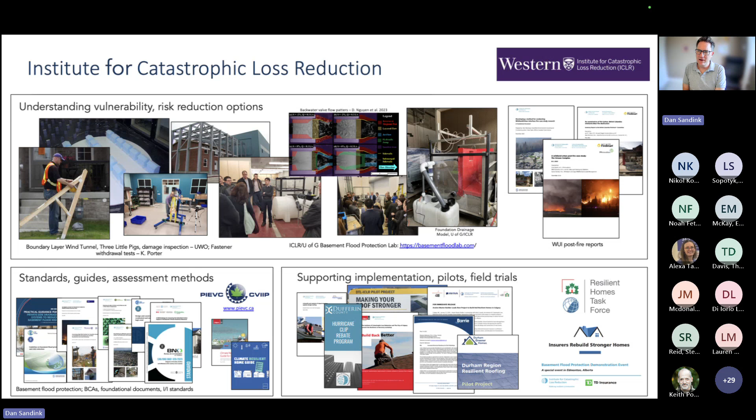On that topic, so I mentioned before, we focus on residential construction. One of the reasons why we focus on residential construction is because that's what we see driving a significant portion of disaster losses, insured catastrophe losses in Canada. My charts here are just providing examples of the proportion of loss associated with personal property claims associated with catastrophe events in Canada.

When you add up all the events over the past 10 years, 2016 to 2025, we find that personal property losses, so losses associated with residential buildings, contents, additional living expenses, account for most, two-thirds of overall losses. And when we break this out into the main drivers of insured loss, hail, wildfire, pluvial flood, high wind, we also find across those hazard drivers of loss that residential buildings drive the greatest proportion of loss. So that's why we focus on that topic.

And I'll describe that our Resilient Homes Task Force is focused on these four topic areas.

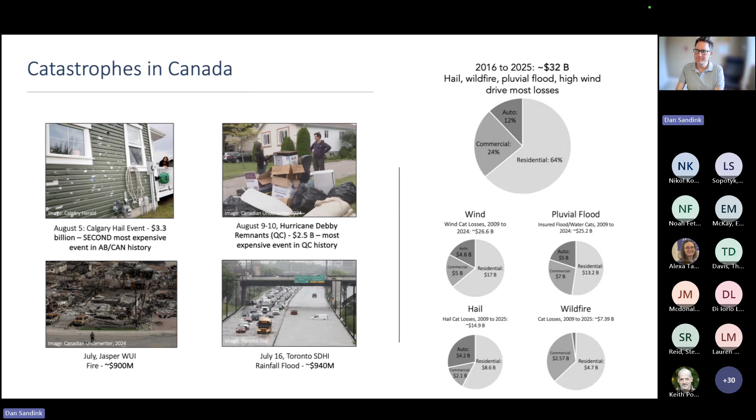The point here is that we have an increasing trend. If we look at both insured loss and societal losses, we find that overall losses are growing at a speed of over two times just the insured losses. The annual increase is about nine times population increase. So it's a significant problem.

One of the things that we do have available to us with respect to the four major drivers of loss is good technical information on how to reduce the impacts of these events. So when we're thinking about homes and communities and exposure to wildfire, urban pluvial flood, high wind, hail, we have pretty good technical information on these topics. We generally know how to protect buildings, but we found that there's been very little uptake of these measures in the building industry and society generally.

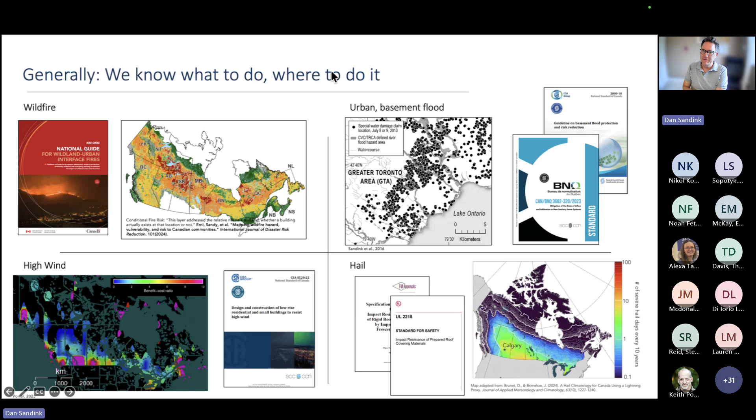So we approached the Canadian Home Builders Association a few years ago, and argued that we should work collaboratively to address the gap between available practices and implementation on the ground of resilience. The argument was that both of our industries, home building and insurance, would benefit from better understanding of resilience practices and building capacity in both industries to apply these measures.

We started discussions with the task force back in February 2024. We've now completed the first phase of work with the Resilient Homes Task Force and are moving on to our second phase. With the initial group, we developed a strategy - a roadmap to move from isolated application of resilience practices in the building, insurance, and renovation contracting industries to more mass market application of those measures.

There's a number of projects we pursued to build capacity in those industries. Field trials were a big part of it, as were guidelines, so that's why I'll focus on those topics today.

Aside from field trials and guidelines, which I'm going to talk about mostly today, we produced a lot of outputs during the first two years of work under the task force. I presented with my colleague Tamara over the past few months to the Friday Forum group and described some of the outputs, like our market research studies. We've done lots of engagement with different groups.

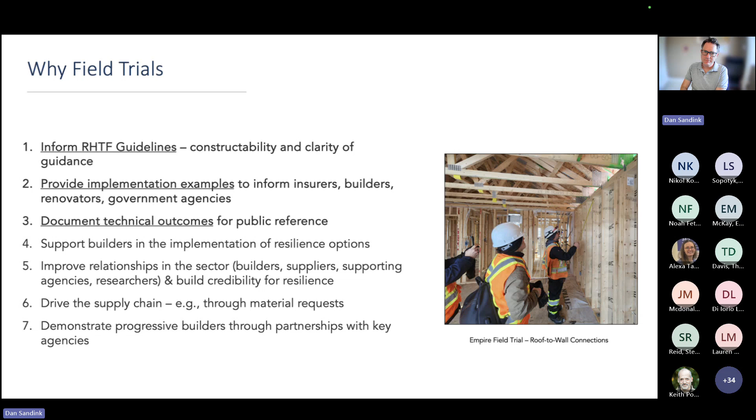At a higher level, the route we're trying to follow mirrors what's been done in greenhouse gas and operational carbon, in application of energy efficient HVAC systems and so on. We're applying a market transformation exercise where we want to move from theoretical or academic practices to market acceptable practices. There's been a lot of work done in this field, and this is one example of a strategy or the necessary conditions for market transformation.

This is from the Energy and Mines Ministers' Conference a few years ago, where they were promoting energy efficient HVAC systems. The argument was that for market-wide adoption of new technologies in the building sector, a number of conditions have to be met.

The building sector needs to be aware of practices or technologies. The technologies have to be available in the Canadian marketplace or in local marketplaces. They have to actually be manufactured. The practices and technologies have to be available from manufacturers.

The practices have to be acceptable, so they have to fit the workflow. They can't introduce significant technical complexity into the construction of buildings.

They have to be affordable. They can't introduce significant additional cost. And I would also add the concept of marketability.

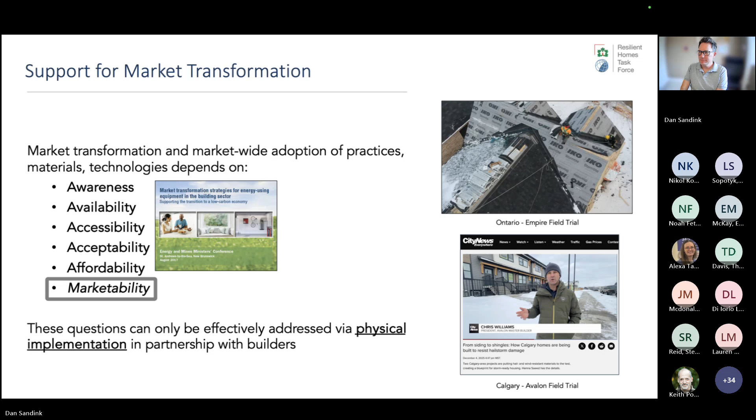The technical knowledge part of the field trials is also important. As I mentioned, we want to apply the measures, learn from application in the field, and have that information feed back into our guidelines.

These are all just examples. This is notably from the Empire field trial, where we applied different gradings for sewer laterals so we could better accommodate backwater valves.

Empire installed a whole continuous load path and some lateral load connectors that were not common in construction practice. We learned a lot through working with them and their modular builder supplier about the details of applying these practices and what's required, again to make sure that what we're recommending for the industry is practical.

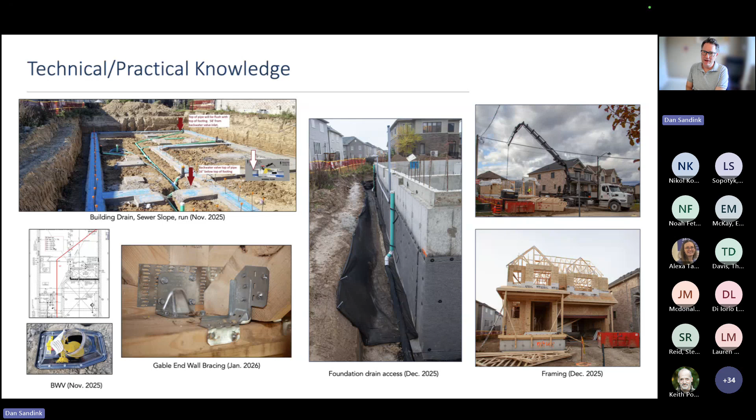There's a number of outputs from the field trial projects that you can access, and I'll provide a link shortly to our Resilient Homes Task Force page.

We have public outputs, things like media interviews, press releases, and that sort of thing. That's more open for the public generally.

We have industry associated outputs. Part of what's being produced from the field trials is videos and web content aimed at other builders in the building sector generally. We're communicating with the insurance industry on outputs of the field trials, especially as it relates to costing of practices, material availability, and so on.

And then there's more technical outputs, with some examples on the right: technical papers, publications, and usable materials for the building sector.

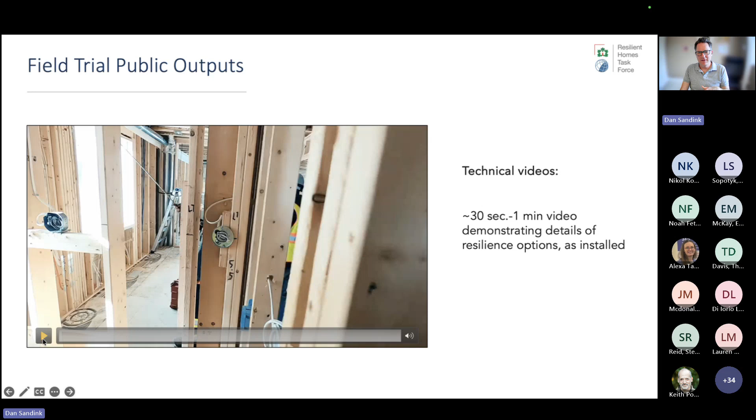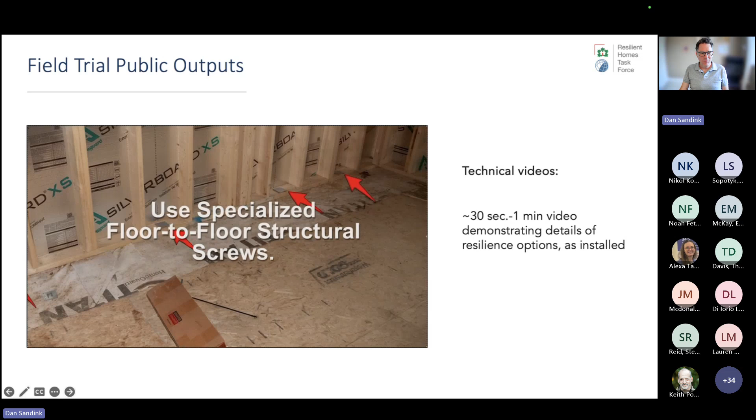One example, aside from the technical reports, is that as builders are installing the measures in the field trial homes, we have a videographer on site recording application of these measures, with the intent of providing practical information to other builders that might explore applying them.

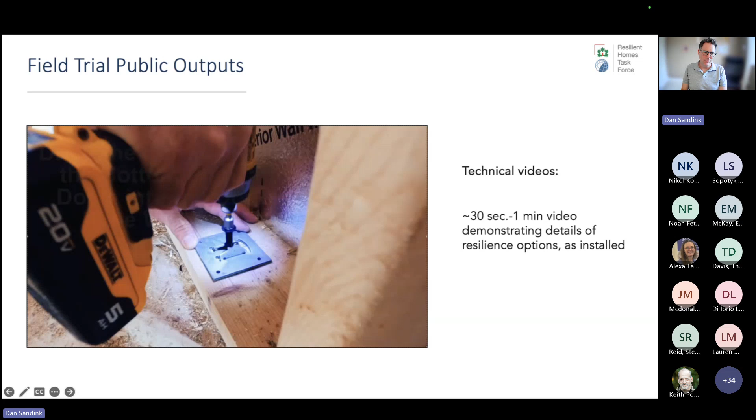So instead of talking about or suggesting floor-to-floor connections, we now have a specific relatable example of how it's actually done in the field.

These examples can be helpful in training trades and getting them on board with application of these measures. So there's a whole bunch of outputs related to field trials, which demonstrates why they're so important, with all these multiple outputs that we get from them.

Another important output of field trials is that they can serve as the core of strategic partnerships. I've got a couple examples here. We've got lots of really good partnerships now, and the guidelines and field trials I think really set the basis for us to have good partnerships.

And promote the concept of resilience. One example is EnerQuality, which was enticed to work with us because of the tiered guidelines and the stepwise approach that builders could potentially take. They worked with us and Farsight to coordinate the IDP work for a field trial in Southern Ontario that's starting up now, and they're serving as an Ontario node of information that has been helpful to us to get our perspective out into the industry.

And again, that's really dependent on usable resources and working on field trials, providing examples of practical application of these measures. Another example is the Durham Region re-roofing field trial.

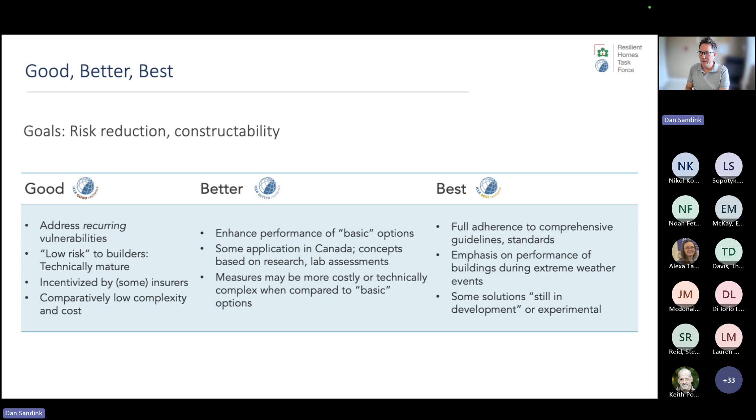So these guidelines, and also a number of the outputs I mentioned before from the field trials, are available at this website, so you can check those out. We have the tiered guidelines now available for the core hazards: wildfire, basement flood, high wind, and hail.

The guidelines also include some other elements. There's introductory material, and there are technical sheets. The technical sheets are meant to back up each of the elements of the checklist. So we have very simple language in the checklist, outlining very basic resilience practices, and each of those items has more detailed documentation, one or two pages, that include photos and 3D drawings, what to look for in building specs and so on, to make it more practical. We also include high-level information on incremental cost, on supply issues, on practicality, and so on.

And then we also have, in each of our hazard areas, a primer on insurance incentives, or how insurance might reflect application of resilience practices, which is another big area that builders wanted us to include in any guidance we put out into the market. So those, again, are available at that website for totally open access and for free. And we're, of course, interested in your comments and feedback on those guidelines.

So in terms of the resilience options for wildfire that were explored as part of this field trial, I'll walk through the guidelines, but first a quick review of some of the important mechanisms for ignition during wildfire events. There's generally three recognized drivers of ignitions when we have wildfires: embers, radiant heat, and direct contact with flames.

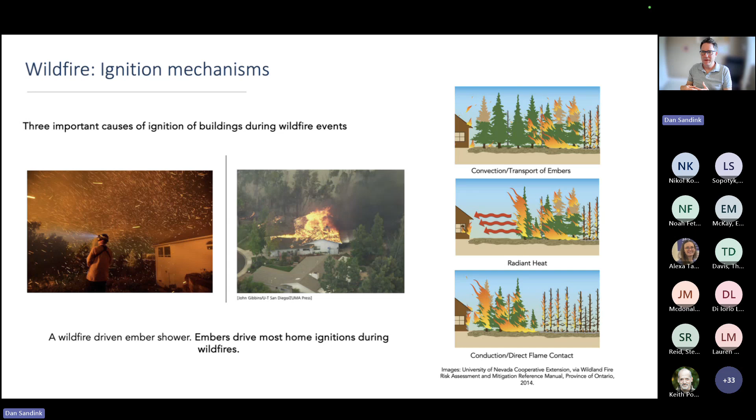Evidence in Canada and elsewhere indicates that embers are an important driver of loss. On the left are examples of an ember shower on a building that was ignited via embers during a wildfire event. The building in the middle is from Alan Westhaver's paper a few years ago for us. You can see that the vegetation around the building had not ignited, but the building ignited due to ember buildup on vulnerable components of the building. Each of these mechanisms of ignition are addressed by different approaches for resilience that I'll talk about shortly.

So for the guidelines we were testing with the field trial for wildfire protection, we worked with RDH, Robin Urquhart, notably Graham Finch, to develop this tiered set of wildfire protection practices. They draw heavily on the NRC WUI Fire Guide, on the US IWUIC, and on FireSmart recommendations for home ignition zones. I would also note that we're following along in the work that RDH had done after the Lytton fire, where they developed a practical document for the building industry to apply wildfire protection—the technical sheets for wildfire resistant construction meant to support rebuilding in Lytton.

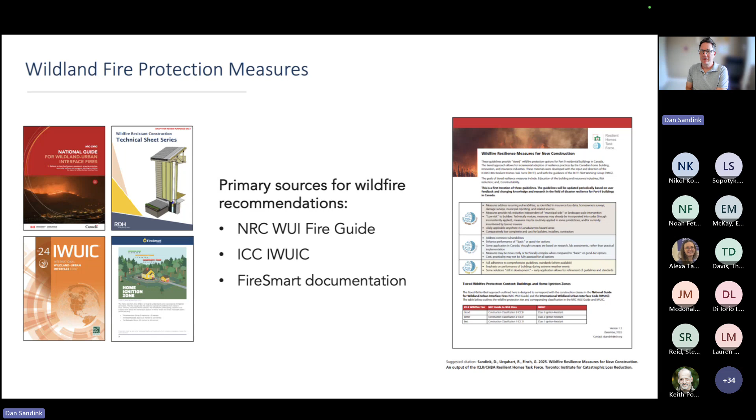At a high level, wildfire protection generally at the site scale includes two elements: management of fuel, management of the home ignition zones, and addressing the building through cladding features, decks, combustible features, largely related to the building envelope and cladding.

The approach adopted in our guidelines includes a mix of these two options, where if you apply more stringent building requirements, you can apply less stringent home ignition zone measures, and vice versa. So as you progress in your home ignition zone measures, you can relax on the building side measures.

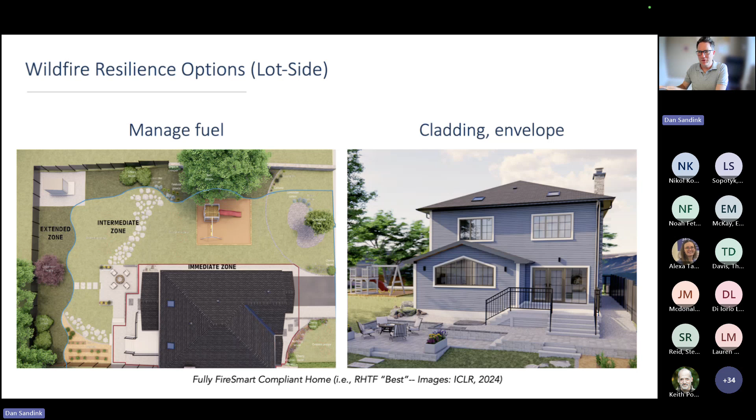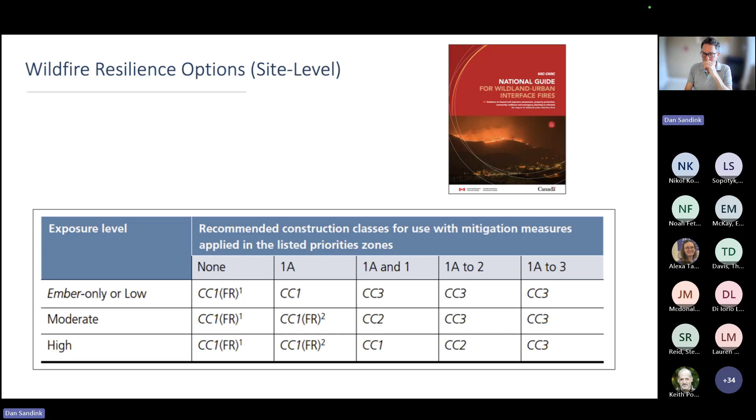This is consistent with the approach in the NRC WUI Fire Guide, which uses a combination of exposure level and recommended building protection practices. We've floated this concept in the NRC WUI Fire Guide for several years with builders and the insurance industry, and they had trouble grasping the concept of fuel versus building practices. So one of the things we wanted to do in the guidelines was make it fairly clear what the relationship meant, or how you would apply the relationship between building measures and landscape fuel measures.

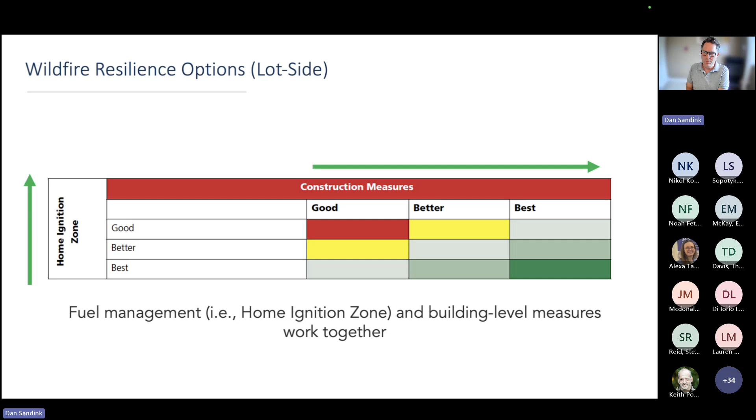Generally, we have good, better, best tiers for home ignition zone management and construction measures. As you move up the tiers for construction measures, you're allowed to apply less stringent tiers for home ignition zones. In terms of the practices themselves, this is the example of basic level practices, the good practices, which are really aimed at protecting buildings from ember ignitions.

It includes minimums like multi-pane windows, non-combustible roof cover, flashings, valleys, and so on, non-combustible fencing around the building, roof venting with openings no larger than 3 millimeters, metal non-combustible gutters and downspouts, making sure we have a non-combustible gap between potentially combustible siding and the ground, and addressing vulnerabilities associated with decks. That's our basic protection practice.

Application of these practices depends on more stringent practices on the home ignition zone side. As we move up the tiers, we include ignition resistant window frames, screens on openable windows, wall vents and flashings addressed, including windows with tempered window panes, fire rated doors, deck surfaces, eaves and soffits finished with metal. So as we move up the tiers, we add additional construction measures.

The highest tier includes additional measures like non-combustible siding, fire resistance ratings for exterior walls, and extending the home ignition zone fence protections beyond just the immediate zone. So as we move up these tiers, we add measures and also add some construction costs for the buildings.

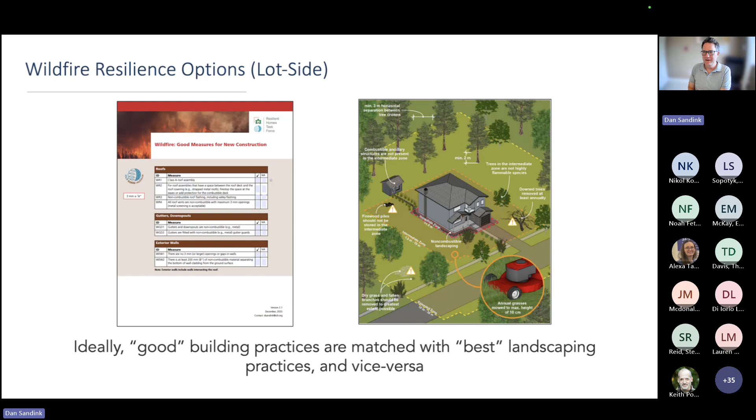So all of the relevant home ignition zone areas around the building, if you want to safely apply those minimum practices. Conversely, if you're not able to manage those home ignition zones fully around the building, then the recommendation is to apply more stringent building protection practices as outlined in the good practices, which are consistent with the full set of FireSmart or NRC Wildfire Guide practices.

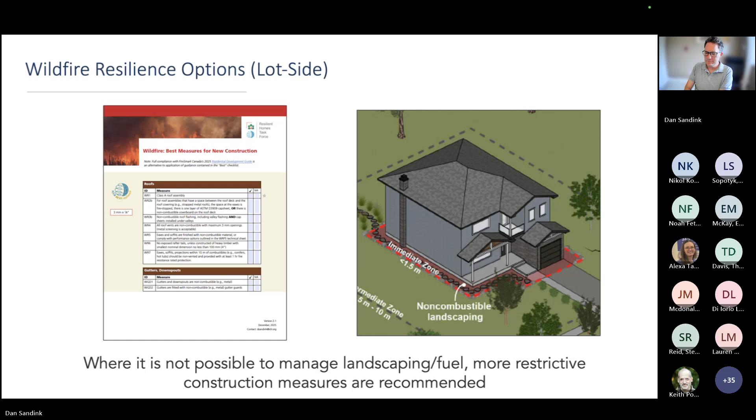Turning back now specifically to the field trials and the case study near Fernie: we started the field trial process with CHBA back in 2024. We sent out a call for proposals and worked through a process, an IDP process, supported by CHBA and also Building Knowledge Canada.

We had some initial applications back in December 2024. We worked through a process with each of the builders that included initial meetings with them, sitting down and walking through their building plans and the resilience recommendations. They would take the recommendations back and work in more detail with their teams, identifying what they could potentially apply. Then we prepared for IDP sessions.

We had one-day IDP sessions with all of the builders involved. After those sessions, we continued the technical discussions, and now across our field trials we're in the construction phase. Some are further along than others, but that's where we are now.

Because we conducted this in partnership with CHBA, we had some caveats for applications. Applicants had to be CHBA members. We were focusing on Part 9 construction, aiming for completion of buildings in 2026. Buildings had to be exposed to one of our relevant hazards and located in a populated area.

There were some requests for field trials in really isolated areas, but we wanted to conduct field trials in a populated area where we could potentially have tours in the future, with standard construction methods like steep slope roofs and wood frame construction. In the case of the big block field trial, it's modular construction. We also had exclusions for severe hazards like floods specifically, and requirements for marketing and public outputs from the projects.

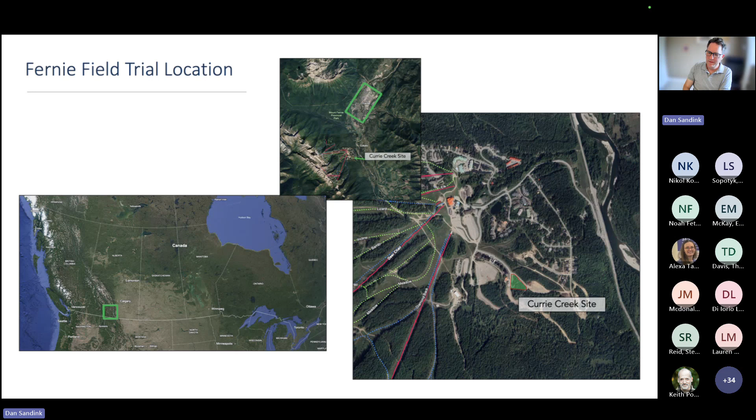As I mentioned before, we've got 10 buildings, 4 units per building. The buildings themselves are about 6,000 square feet, with a 2,200 square foot building footprint area. There's 6-meter setbacks and so on. You can see the layout of the site there.

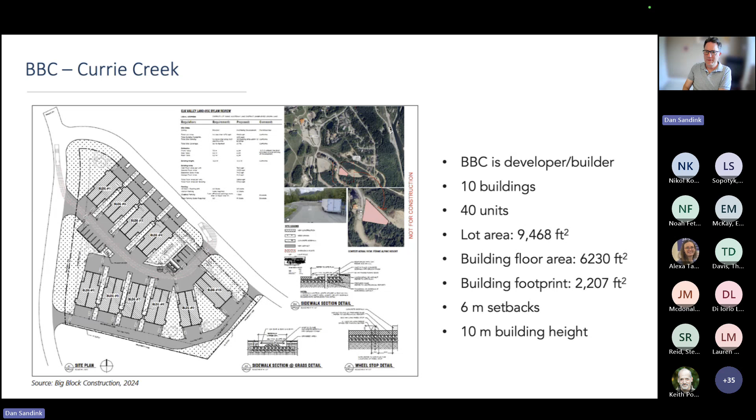It is considered, through the City of Fernie's wildfire protection plan, to be in a high exposure area for wildfire. So this is part of the impetus to focus on wildfire protection as well.

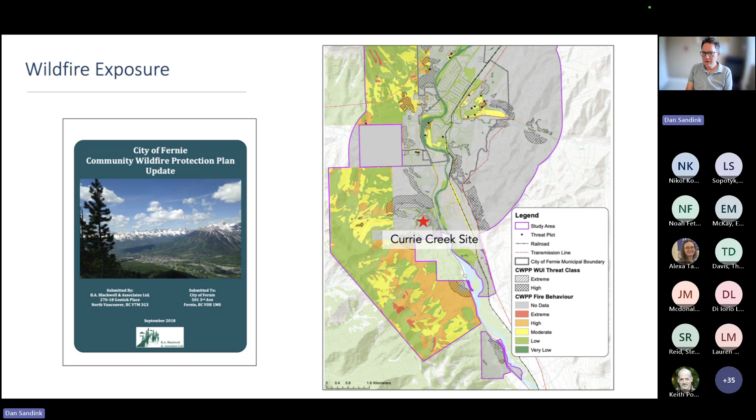You can check out the development itself on the website, curriecreek.ca. They're selling the units now. I also wanted to point out that they're at the stage where they're marketing the buildings and include multiple features, such as wildfire protective construction practices. So that's been a feature of the marketing for the site.

You can also check out our task force site. There's a recent TD Stories article that includes an interview with the local FireSmart representatives and Alex Miller, the CEO of Big Block Construction.

In terms of selection of measures, as I mentioned before, we did a series of meetings. We had RDH Building Science involved as the cladding and wildfire envelope experts. The first milestone was the design charrette that we held with Big Block near the site in Fernie, on the Fernie Alpine Resort, in January of 2025.

I think it's important to identify who was involved. The point of the IDP sessions is to have a wide cross-section of building company staff representing different elements of responsibility. So with the owner, we had the project manager, architect-related people, and marketing people there, to get multiple perspectives from the building company on each of the resilience measures. The structural engineer was there, as well as their energy auditor.

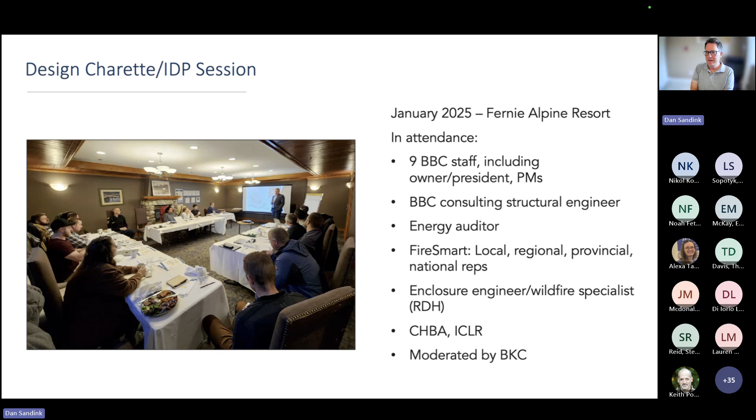Building Knowledge Canada has been running these types of sessions across Canada for a long time, especially for energy efficiency and high performance building design. As a new concept, resilience, we wanted to make sure we were following the same structure builders were used to. So it was important to involve a trusted moderator at the sessions. That was an important detail of conducting these sessions.

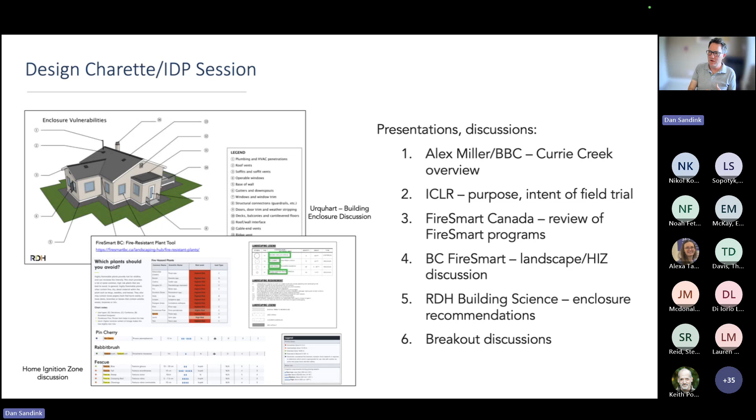At each of the sessions, we started with detailed overviews of resilience measures. Alex Miller from Big Block Construction provided a general overview of the site. ICLR talked about the purpose of the field trials. FireSmart Canada talked about their programs. BC FireSmart provided a review of landscaping or home ignition zone recommendations. Then RDH provided the detailed enclosure discussion. After that, we had breakout discussions with everybody at the sessions.

We had 3 breakout sessions that focused on landscaping practices, building enclosure details, and owner-occupant community impacts associated with the application of the measures. We walked through each of these breakout exercises, with two specific exercises where we had each of the resilience measures available, and rated them in terms of the impact on design, the impact on constructability for the building, whether owners would accept these measures, the hard cost associated with applying these measures, and also the potential maintenance aspect of including these measures.

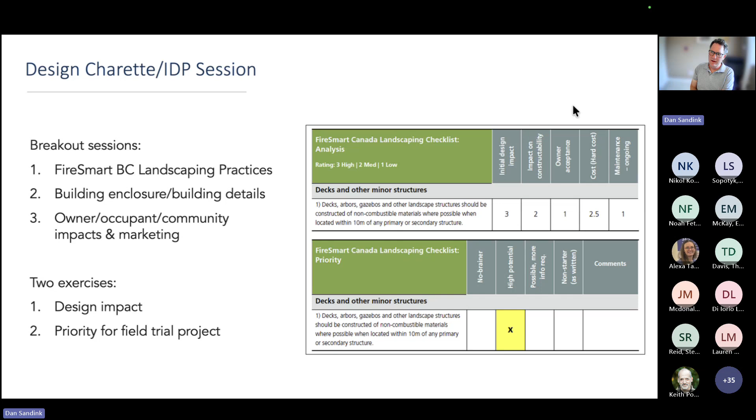We tried to get into these details for every single one of the measures presented to the group, both on the building envelope side and on the landscaping side. We also went through an exercise where we prioritized each of the measures for the field trial. We had 17 home ignition zone measures that we walked through and about 38 building measures.

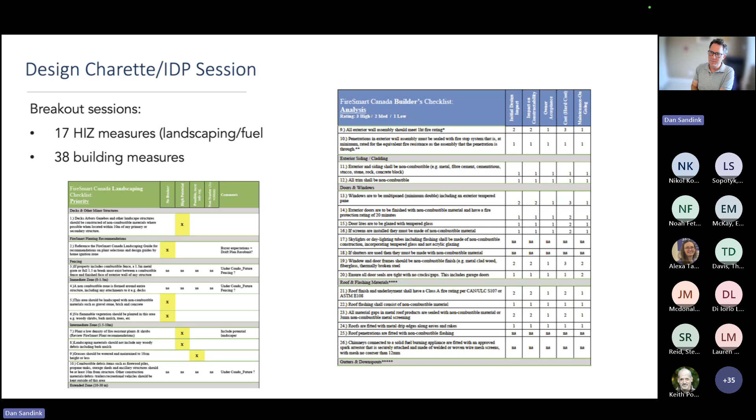It took some time to walk through each of these measures and conduct both exercises, but it was meant to be a very thorough introduction, review, and discussion with the building company about whether or not the measures were practical. I'll quickly run through some of the landscaping discussions. We actually had some meetings before the IDP session focused on landscaping.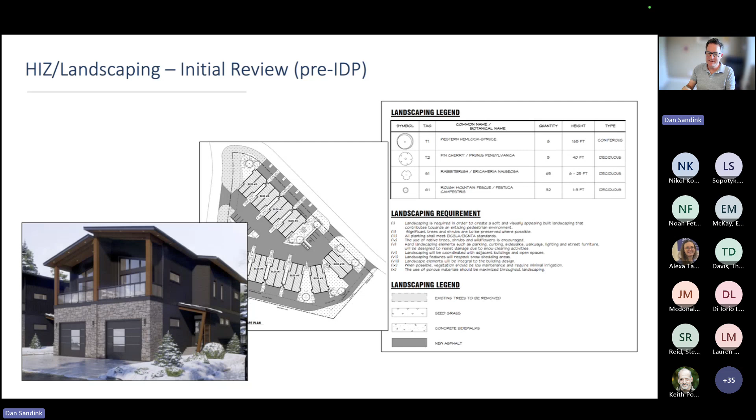Big Block provided their initial landscaping plans and renderings of the buildings. We worked through those renderings and identified some potential issues. For example, there were plans to include spruce potentially on site, along with other species like pin cherry, rabbit brush, and fescues. We worked with BC FireSmart and used their online tool, which is really helpful to identify which species would be more fire vulnerable.

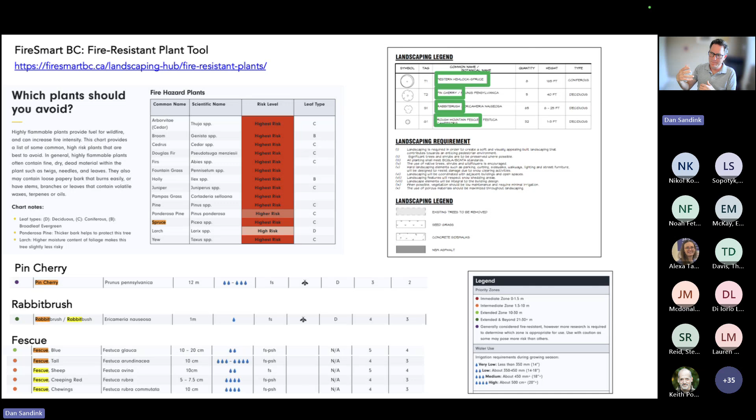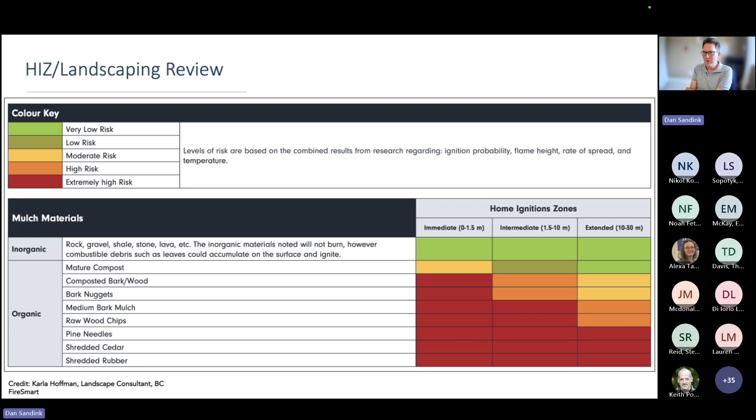We made a series of recommendations related to ground cover, again using the online tool to indicate where certain ground covers could be used in different home ignition zones around the building. This was an important input as well. Some initial recommendations were meant to reflect the desire to have a nice looking landscape, including nice looking trees and flowering bushes, while also selecting species that were not fire vulnerable.

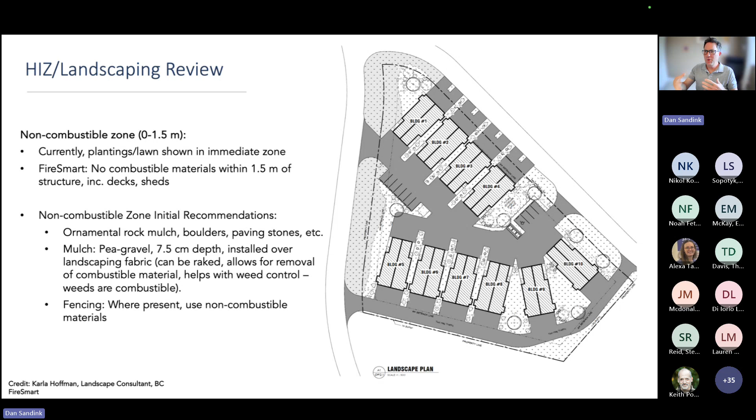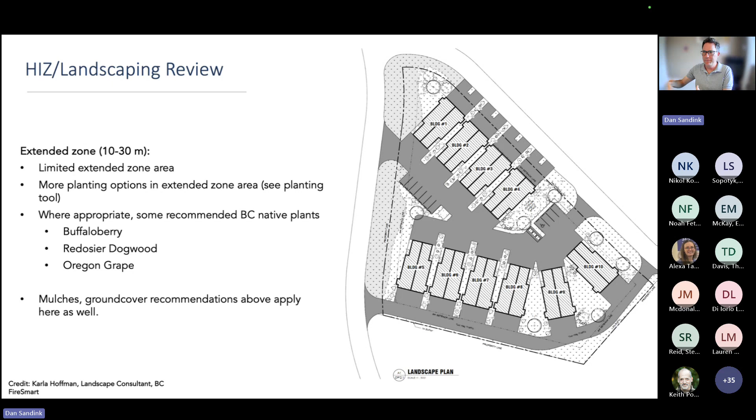We went through this exercise with the builder and made these recommendations - I'll leave the slides with you to walk through. The recommendations varied based on the home ignition zone, including non-combustibles in the immediate zone, and then relaxed requirements as we moved out through the home ignition zones into the less high priority zones.

Some conclusions from the IDP session were that home ignition zone recommendations beyond 10 to 30 meters, especially given the layout of the site, were largely outside the scope of the developer. I should mention that Big Block was both developer and builder, and that maintenance items included in the wildfire recommendations from FireSmart are not in scope of the developer per se, but they could be included in strata rules or condominium agreements for the site.

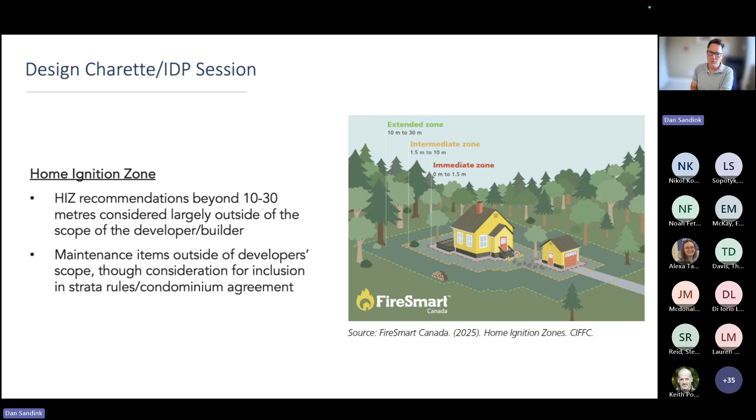For highly accessible measures, we had each of the measures recommended for home ignition zones and buildings ranked in terms of their accessibility, from what we called no-brainers to not possible for the site. Some of the no-brainers identified during the session were FireSmart recommended plant and tree species and use of non-combustible materials for ground cover - those are some of the more accessible measures identified in the session.

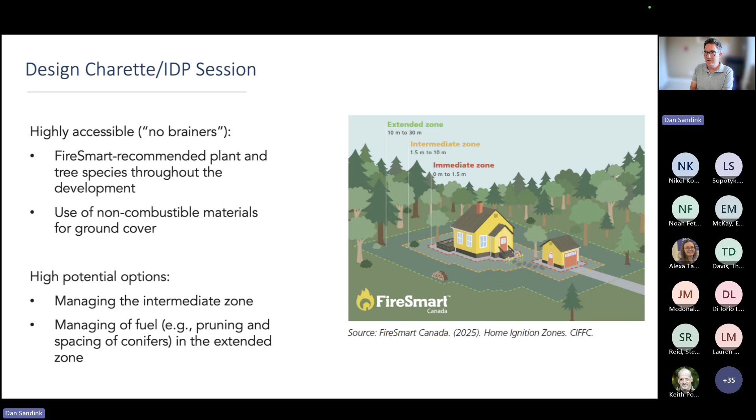Some higher potential measures, but not necessarily shoe-ins, were managing the intermediate zone and management of fuel beyond in the extended zone through maintenance recommendations.

For building measures, the no-brainers included non-combustible exposed foundations, addressing 3mm gaps in exterior walls, and non-combustible siding and trim. In the case of this building, non-combustible siding was already going to be incorporated into the build because it's more of an upper end site.

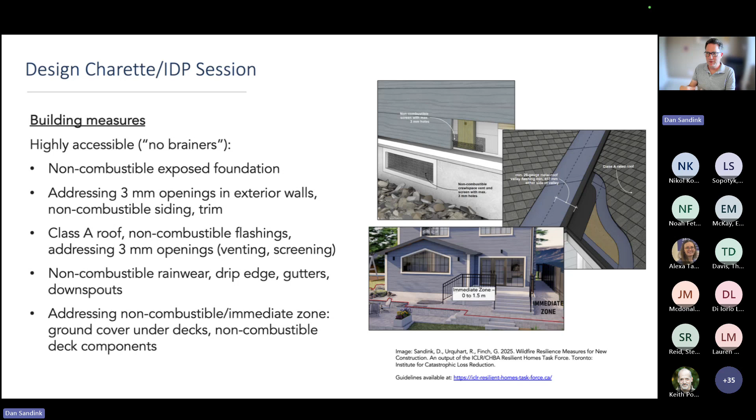Class A roof cover, non-combustible flashings, and addressing 3mm openings in roof covers were considered accessible measures. Non-combustible rainware - drip edge, gutters, downspouts - and addressing the immediate zone, like ground cover under decks and non-combustible deck components, were considered highly accessible measures during the IDP session.

Measures considered high potential included tempered pane exterior windows, fire-rated doors, tempered glass door lites, non-combustible window screens, and garage door options ensuring no gaps over 3mm. Some possible options included doors and windows with non-combustible frames, non-combustible decks, balconies and attachments, and enclosed under-deck areas.

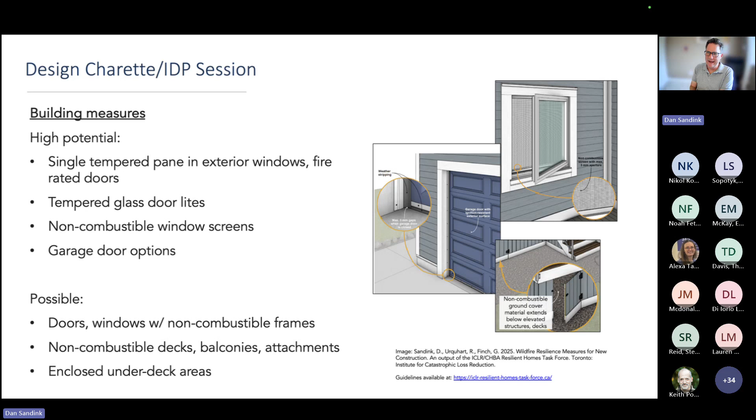I should note that the theme here is that this was the initial review at the IDP session, and as we moved along, looking for suppliers and so on, some of these measures were walked back - but that's just part of the process of applying a field trial.

So aside from the field trial session itself, the IDP session, after that session there were still a lot of discussions that occurred between our envelope specialist, ICLR, and Big Block. So the IDP session did not necessarily seal or cement the options that would be included in the building. There's still lots of discussion that had to go on afterwards.

It was sort of decided that they would generally aim toward the better construction measures. There are some measures that were ruled out later on due to costs, like tempered pane windows, wall assemblies with fire resistance ratings, and so on. It required some more exploration by the builder before a good decision could be made about those practices. So I'll quickly walk through measures that were adopted.

This is in the paper, and there's some tables there that indicate what was adopted based on the tiers that we use for the protection classes or the wildfire guidelines. In terms of good practices, essentially all of them were adopted: non-combustible flashing, multi-pane windows, Class A roof cover, metal roof openings, addressing 3mm vents, gutters and downspouts, underdeck areas, non-combustible area close to the surface of the ground. Those were all fairly accessible measures.

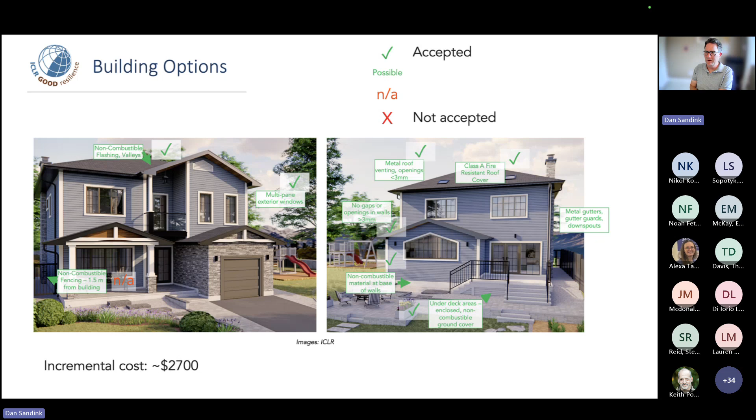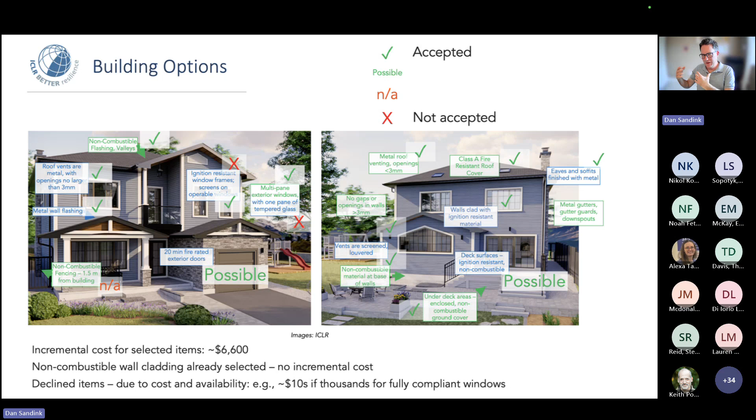As we moved up the tiers, some things were ruled out, like tempered pane windows, just because of the cost. But a number of additional measures were incorporated. Most of the measures were incorporated, with some still up for decision based on the status of construction - they're still looking into fire-rated doors and so on. But for the most part, the good and better practices were accessible for the builder.

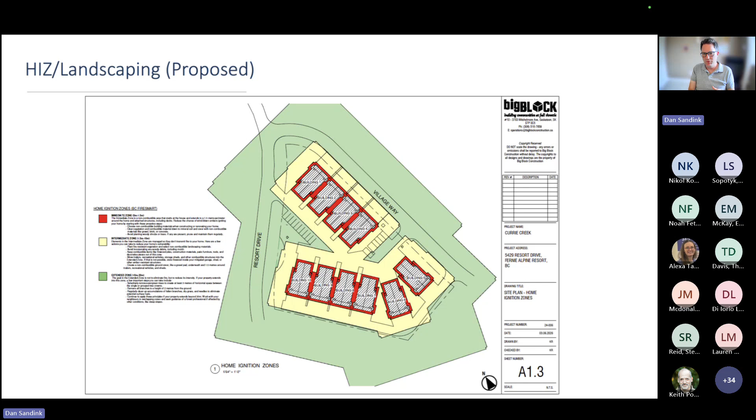In terms of hazard ignition, home ignition zones, and landscaping practices, the construction is still underway. The team did map out the home ignition zones for the site and have proposed several options based on the FireSmart recommendations. So non-combustible ground cover in the immediate zone, rock and concrete ground cover and so on would be used or is recommended for application.

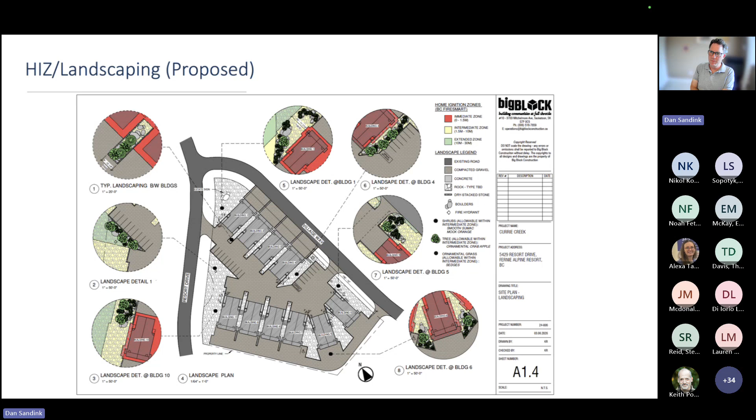Some of the combustible materials have been moved out of the more immediate home ignition zones, and species have been selected using the FireSmart recommendations. So both the building measures up to largely the better tier, and most of the home ignition zone measures for the site specifically, were adoptable.

So some conclusions from this initial field trial - and as I mentioned before, we've got several of these field trials ongoing. One is that it's important to incorporate resilience measures early in the design process. As I mentioned before, we engaged CHBA and potential builders back in December 2024 with a deadline of having construction completed by 2026.

In order for projects with construction to be complete by 2026, we're largely working with home builders that had designs already submitted for permits. So we didn't have a lot of latitude to change materials and design practices. Our field trials with 1 to 2 year timelines don't always align with construction schedules. So where builders are looking to apply resilience measures, we'd recommend very early adoption, and we'd suggest moving that IDP one-day session to very early in the process, as opposed to the stage where we had an opportunity to engage them with our field trials.

Alex Miller and the Big Block team are using modular construction. One of the findings of this work is that modular construction is no hindrance to applying these measures. If anything, it facilitated application of these measures.

There were some supply chain gaps. There is, in some cases, limited product in Canada. Often we're relying on US testing standards or California testing standards - that is a gap in the Canadian market. So the more we can build the supply side of the resilience supply chain, the better we'll be. That relates to things like non-combustible doors, tempered pane windows with non-combustible frames that are accessible at a reasonable cost. One thing we hear about often is lack of availability of off-the-shelf venting products that include 3mm mesh. These are all areas where there were some issues finding product.

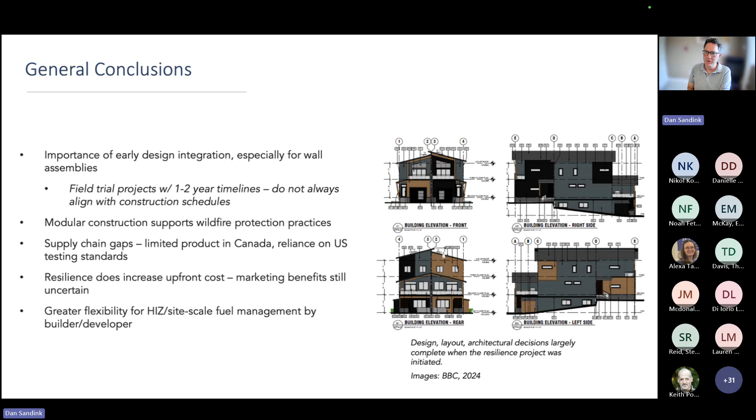Another thing we're finding, not just in this field trial but generally, is that builders lack accessible information on hazards. I showed earlier the City of Fernie's Community Wildfire Protection Plan that provides hazard information on wildfire exposure in the Fernie area. This is not a document usually reviewed by builders, and there is information available on wildfire exposure, and that goes for hail exposure and many types of flood exposure, but it's really not in a format that builders find useful.

So it did require working with ICLR and the envelope expert to bring that information to the table and make it compelling to the builder. This is still a major gap in Canada, readily accessible hazards information, especially because we're dealing with voluntary protection practices.

The FireSmart planning tool was a great example of an accessible tool that was really helpful in defining what to do on the home ignition zone side. That serves as a good example of what we should be doing with respect to resilience, to make sure that these measures are accessible.

Another potential barrier is the technical expertise required to support builders on wildfire protection. There's a lot of detail when it comes to venting and sealing elements of exterior walls and selecting materials, which required expertise in the form of RDH's envelope expert, really helpful for the field trial. There's very limited expertise in this area in Canada, so building up the consultant side, the enclosure consultant side, should be considered an important element of building capacity for application of these measures.

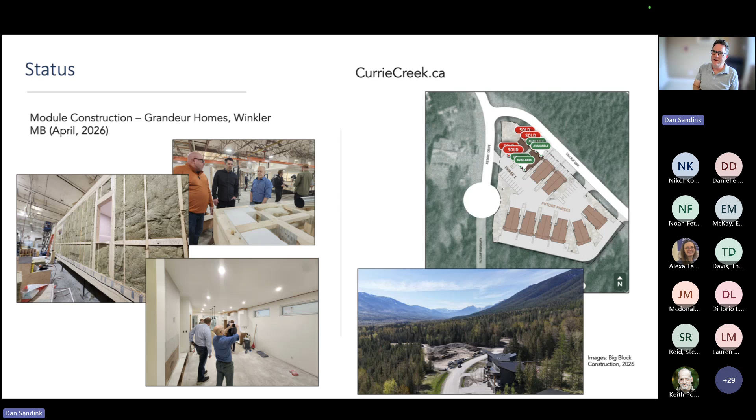In terms of status of this project, construction is underway. Keith and I were at the factory in Winkler, Manitoba, and Alex and the team gave us a good walkthrough of the buildings. The buildings are being marketed - you can check out curriecreek.ca and see exactly how they're referencing wildfire protection in their marketing packages. So I'll end it there.

As I mentioned before, this work continues. This is one field trial of many, and I think we'll learn more as we continue with these field trials. We hope to do many more over the next few years with our ongoing agreement with the task force. And as always, whoever's listening, if you're interested in reviewing the guidelines specifically, please do so and send your comments. These are meant to be updated frequently, at least in the first couple of years, so we're interested in your feedback.